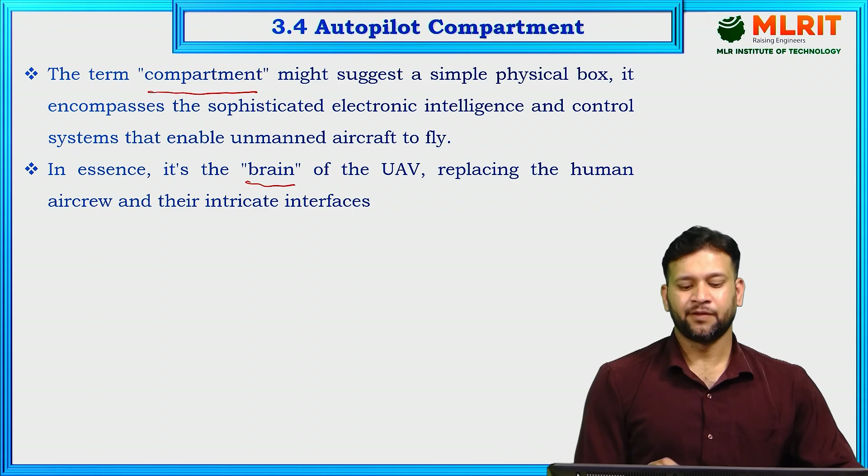What is the Automatic Flight Control System, AFCS? At the core of the autopilot compartment is the AFCS. This system is the thinking part of the unmanned air vehicle, responsible for controlling and stabilizing the aircraft during flight. The AFCS accepts commands, compares the aircraft's current orientation and state with the commanded parameters, and then issues instructions to other parts of the system to make necessary corrections.

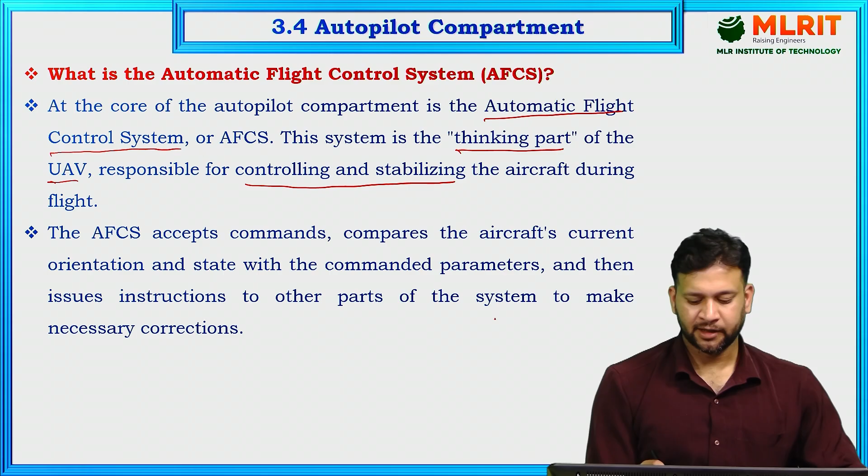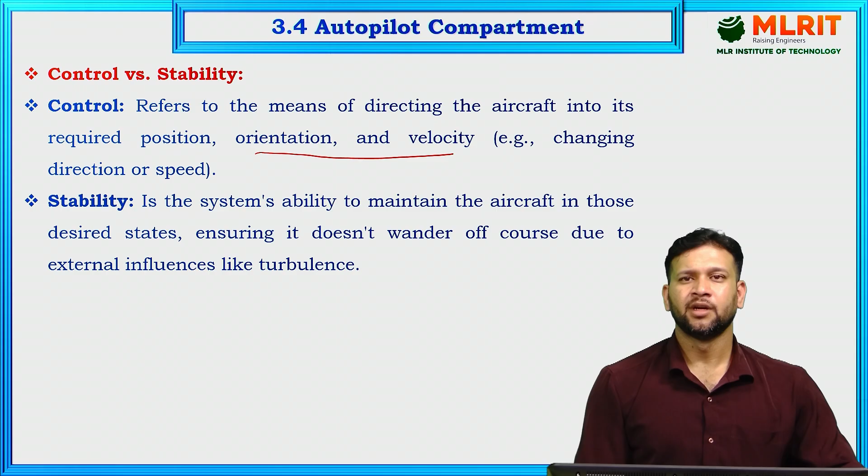Autopilot's role in control versus stability. Control refers to the means of directing the aircraft into its required position, orientation, and velocity, for example changing the direction or speed of the unmanned air vehicle. Stability is the system's ability to maintain the aircraft in those desired states, ensuring it does not wander off course due to external influences like turbulence and gust loads, ensuring that sudden disturbances do not destabilize the unmanned air vehicle.

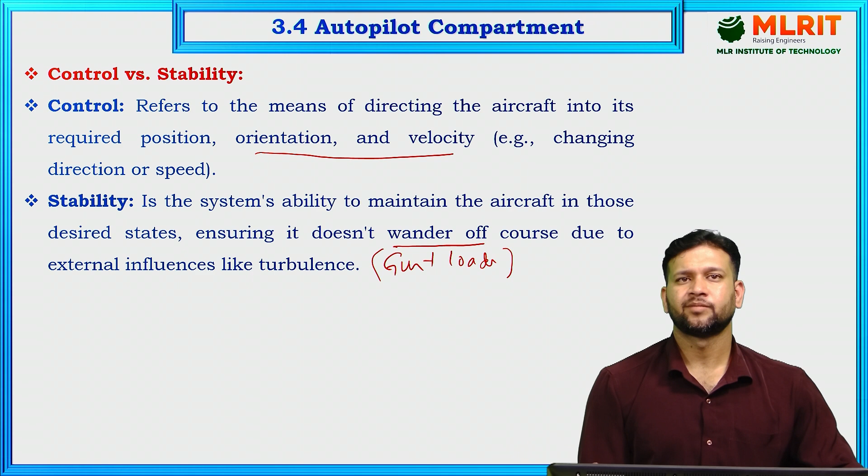Autopilot compartment's role in automation versus autonomy. Automation: the AFCS provides automatic decision making where a pre-programmed flight profile or set of rules is executed without continuous human input. For instance, a UAV flying a pre-programmed mission from takeoff to landing without further external instructions is considered automated.

Autonomy, a more advanced capability involving artificial intelligence, allows the system to make its own decisions without human intervention or pre-programming in response to unplanned situations. This requires intelligence and a readily available source of experience.

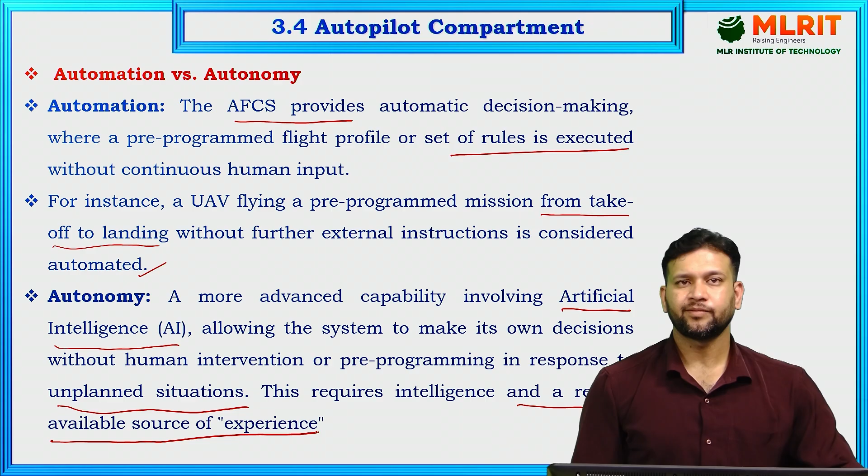Components of the AFCS autopilot compartment. The autopilot compartment, more accurately the electronics module or avionics bay, houses several critical subsystems. The first one is sensors - these are the eyes and ears of the AFCS.

Category 1 under sensors are attitude and heading sensors, subcategorized as: vertical attitude gyros, which measure pitch and roll angles relative to the horizon; heading gyros and magnetometers, which provide directional information of the unmanned air vehicle; and angular rate gyros, which measure rotation rates around the aircraft's axes - pitch, roll, yaw - essential for damping oscillations.

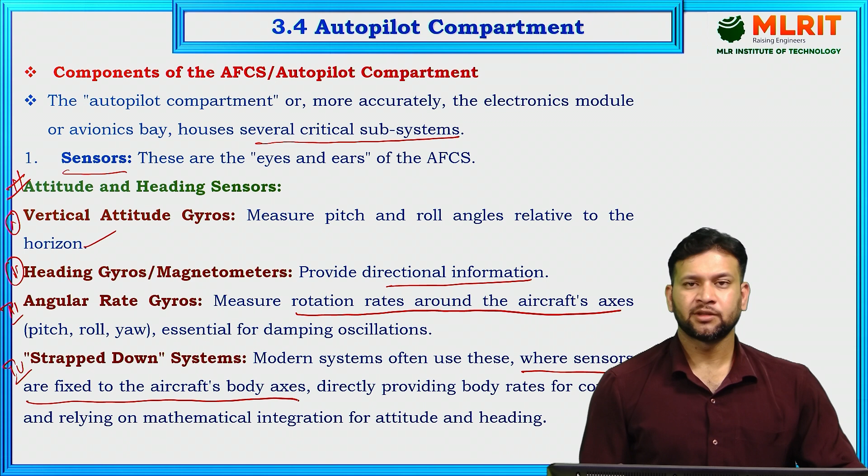Strapped down systems - modern systems often use these, where sensors are fixed to the aircraft body axes, directly providing body rates for control and relying on mathematical integration for attitude and heading.

These are the axes. Longitudinally, the nose goes up or down. If it is nose up, it is pitch up. Nose down is pitch down.

Same thing if we see from the top view - this is yawing. If it moves to the right side, it is a positive yawing movement. If it is moving to the left side, it is negative yawing movement. This is with respect to the longitudinal axis, this direction.

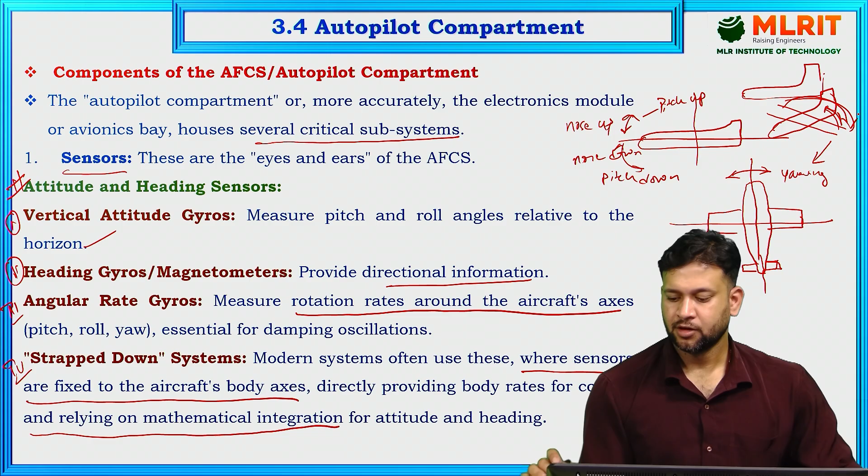And when it comes to roll, this comes into the picture. We'll see here. If this is moving up, coming like this, it is a positive rolling movement, and if it is vice versa, it is negative rolling movement.

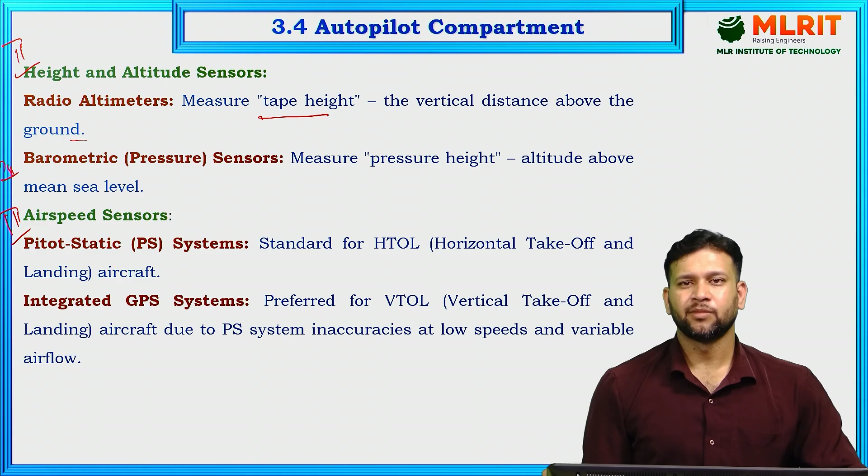We have another category housed inside this avionics compartment: airspeed sensors, which constitute pitot static systems and integrated GPS systems. Pitot static system is used to measure the standard for HTOL, that is horizontal takeoff and landing aircraft, and integrated GPS system is preferred for VTOL, vertical takeoff and landing aircraft, due to pitot static system inaccuracies at low speeds and variable airflow.

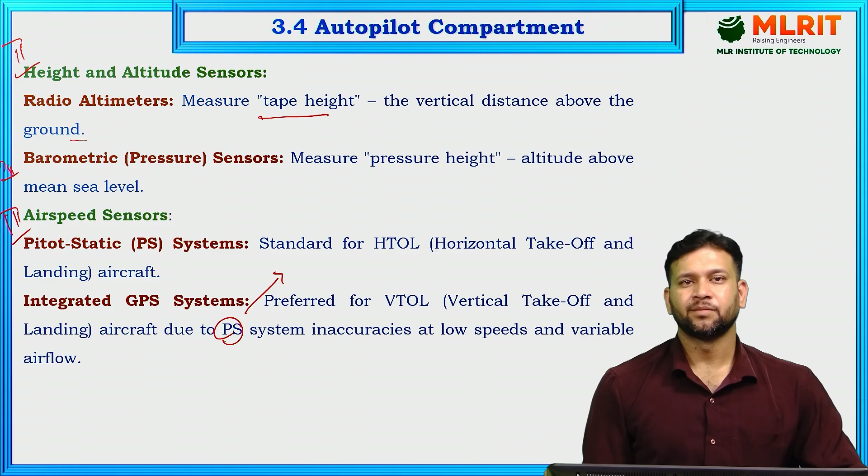Computing core, this is the brain of the system, processing all sensor data and executing flight programs. It contains memory to store mission plans, localized flight programs, and potentially a database of flight characteristics. Modern AFCS logic is typically digital and software based.

Actuators are used. These are the muscles that translate the AFCS commands into physical movements. They operate the engine controls, which is throttle, used to increase and decrease thrust, and the aerodynamic control surfaces, for example ailerons for rolling, elevators for pitch up and pitch down, rudders for yawing motion in fixed wing, and collective and cyclic pitch for rotary wing. Often they are electrically powered.

Power supply systems. These provide reliable electrical power, which is critical for all AFCS components, communications, and imaging systems. This can come from batteries or engine-driven alternators.

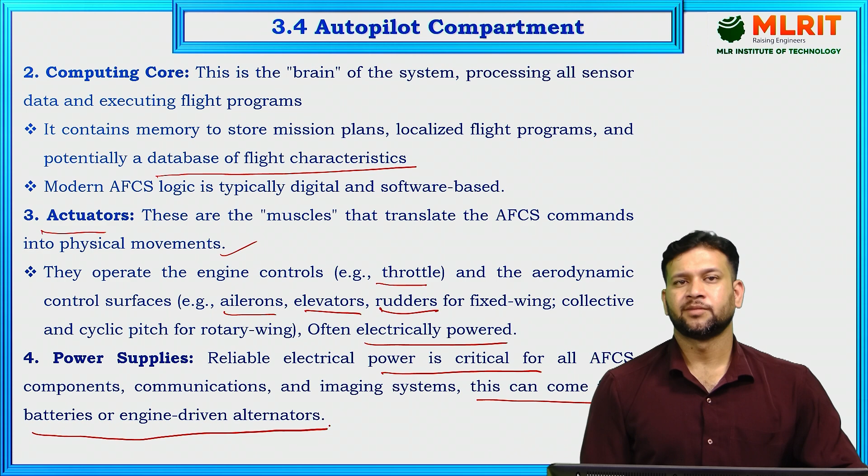The communication links, while a separate system, the AFCS interfaces directly with the communication system to receive control inputs and transmit data. Physical packaging and considerations.

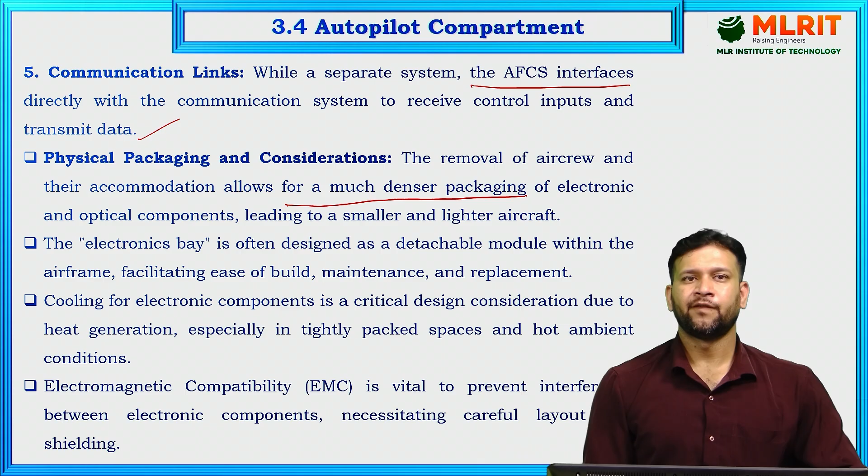The removal of aircrew and their accommodation allows for a much denser packaging of electronic and optical components, leading to a smaller and lighter aircraft.

The electronics bay is often designed as a detachable module within the airframe, facilitating ease of build, maintenance, and replacement.

Cooling for electronic components is a critical design consideration due to heat generation, especially in tightly packed spaces and hot ambient conditions. Electromagnetic compatibility is vital to prevent interference between electronic components, necessitating careful layout and shielding.

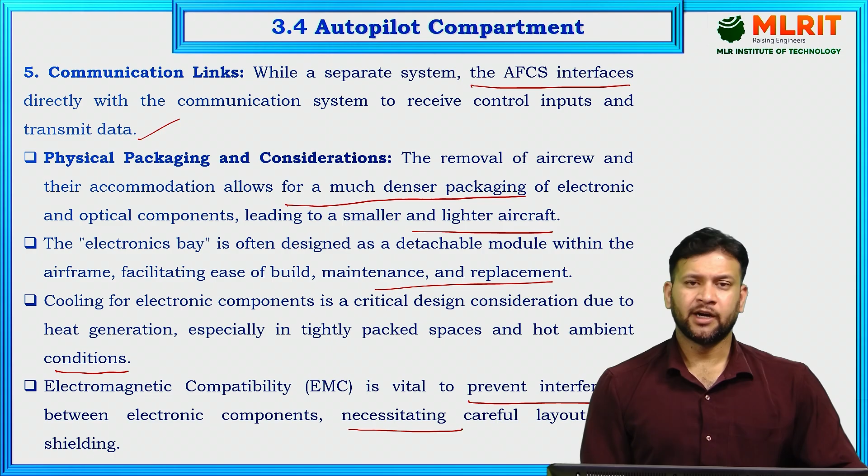The AFCS operates as an integral part of the total UAV system, where no single subsystem is more important than other, though the aircraft often drives the requirements for other elements.

The control channels. The AFCS manages several key control channels. First, the speed channel, which compares commanded airspeed with actual airspeed and adjusts propulsor thrust accordingly. Heading channel compares commanded heading with actual heading and operates rudder and ailerons for correction. Height and altitude channel compares commanded height and altitude with sensed data, adjusting elevator deflection and propulsor thrust for climb or descent.

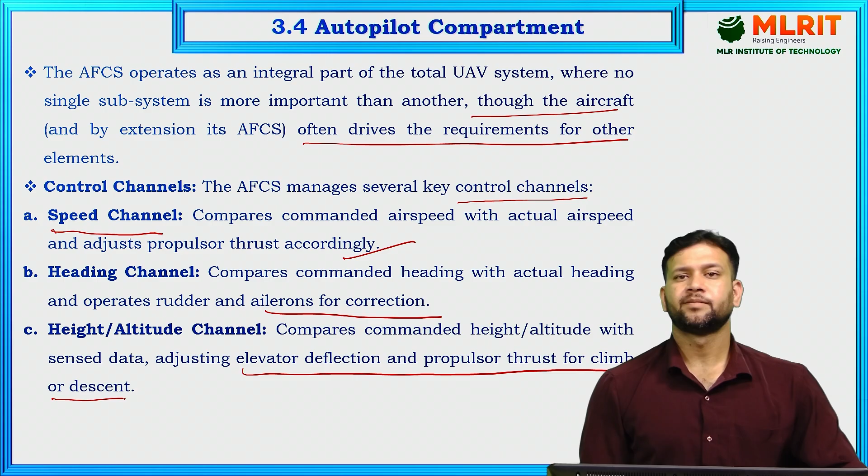Stability implementation using the autopilot compartment. For aerodynamically stable aircraft, for example traditional fixed wing, the AFCS provides damping and precise control, but the aircraft will still respond to air mass movements.

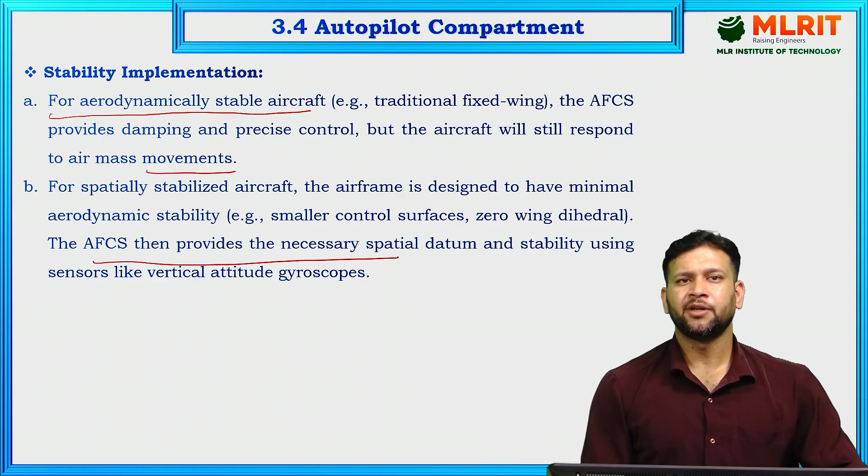For spatially stabilized aircraft, the airframe is designed to have minimal aerodynamic stability, for example smaller control surfaces and zero wing dihedral, and the AFCS then provides the necessary spatial datum and stability using sensors like vertical attitude gyroscopes.

Aircraft configuration specifies HTOL, horizontal takeoff and landing fixed wing, which uses aerodynamic control surfaces like ailerons, elevators, and rudders. Single main rotors are SMR helicopters.

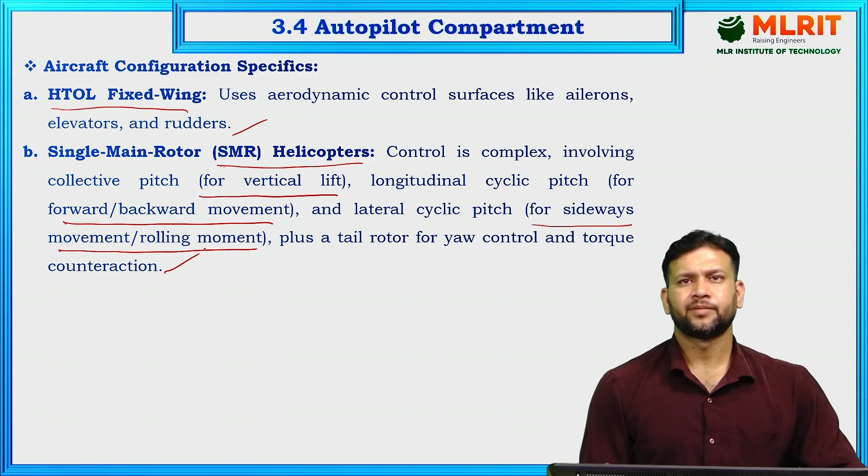Control is complex, involving collective pitch for vertical lift, longitudinal cyclic pitch for forward-backward movement, and lateral cyclic pitch for sideways and rolling movement, plus a tail rotor for yaw control and torque counteraction. The AFCS must manage these complex couplings.

Coaxial rotor helicopters offer greater symmetry, simplifying the AFCS design due to fewer complex mode couplings. Yaw control, for instance, is achieved through differential collective pitch with no resulting side force to balance.

Hybrid aircraft, for example using tilt rotor mechanism, can vertically take off and cruise horizontally. The AFCS is significantly more complicated as it must manage the transition between hover and cruise, phasing in and out different control mechanisms, for example tilting rotor shafts and wing flaps.

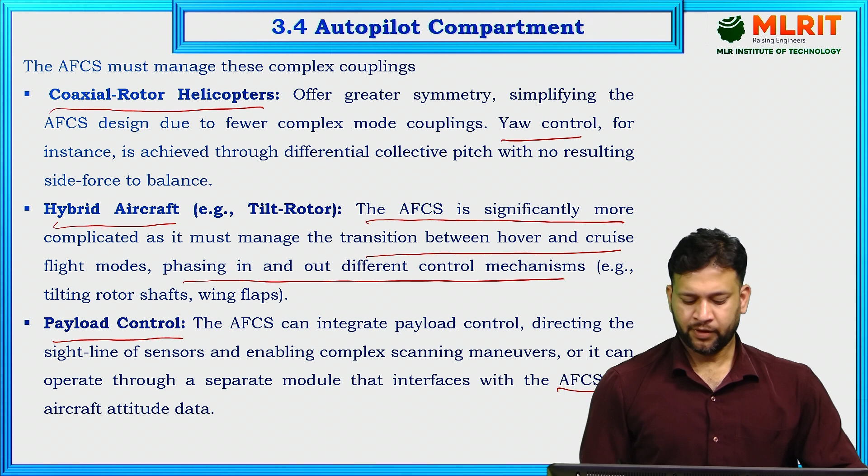Payload control. The AFCS can integrate payload control, directing the sight line of sensors and enabling complex scanning maneuvers, or it can operate through a separate module that interfaces with the AFCS for aircraft attitude data.

Designing the autopilot compartment and its AFCS involves numerous challenges. First is scale effects. Smaller UAVs operate at lower Reynolds numbers, leading to higher aerodynamic drag and lower achievable lift coefficients, which the AFCS must compensate for. Reliability: the AFCS is flight critical, so robust design and rigorous testing are essential to meet reliability targets, especially given historical failure rates where power plant and flight controls are major contributors.

Environmental resilience: the components must withstand extreme temperatures, humidity, and vibrations experienced during transport, ground operations, and flight.

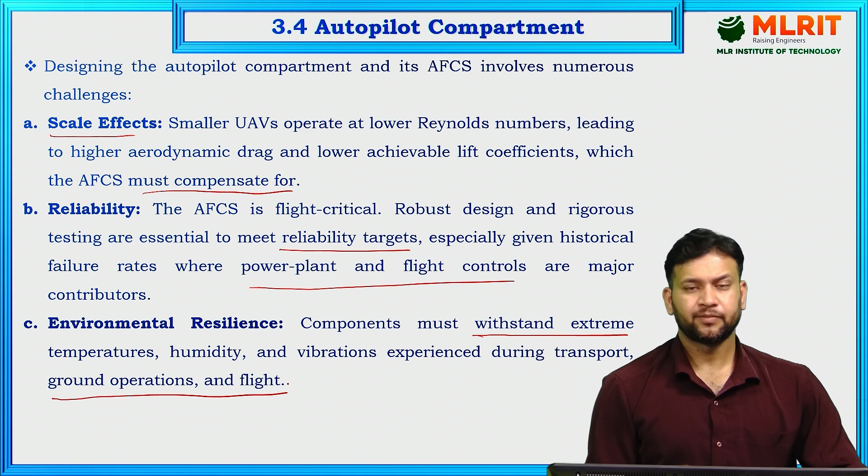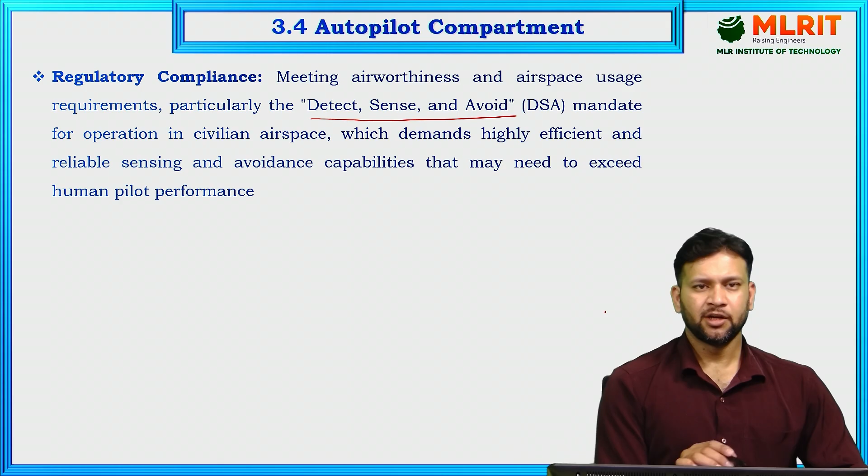Regulatory compliance: meeting airworthiness and airspace usage requirements, particularly the detect, sense, and avoid mandate for operation in civilian airspace, which demands highly efficient and reliable sensing and avoidance capabilities that may need to exceed human pilot performance.

The autopilot compartment, or more accurately, the sophisticated automatic flight control system, is a linchpin of modern UAV operations. It integrates a complex array of sensors, computing power, and actuators to manage the aircraft's control and stability, adapting to diverse configurations and potential demands.

The ongoing evolution of this technology, especially towards higher levels of automation and autonomy, continues to shape the future capabilities and broader deployment of unmanned aircraft systems.